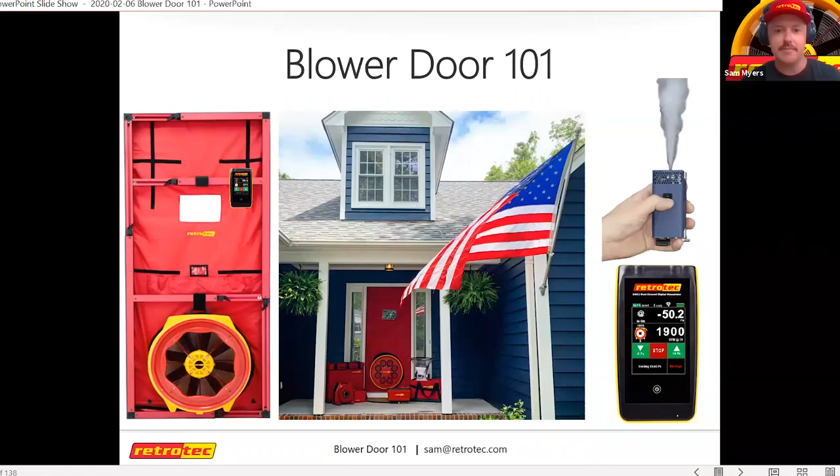A little bit about myself. I kind of serve as Retrotec's in-house building science consultant. Used to be a HERS rater for an engineering firm in Raleigh, North Carolina called Advanced Energy. So I'm a recovering HERS rater, I guess. So I used to be in the field quite a bit doing this kind of thing.

So let's start off with air tightness and why we care about this sort of thing. Why do we test houses for air tightness? Sometimes code requires this, or from a builder standpoint, it can be for quality control. If a builder says they build great houses, it's nice to have the papers to prove it, to go along with it.

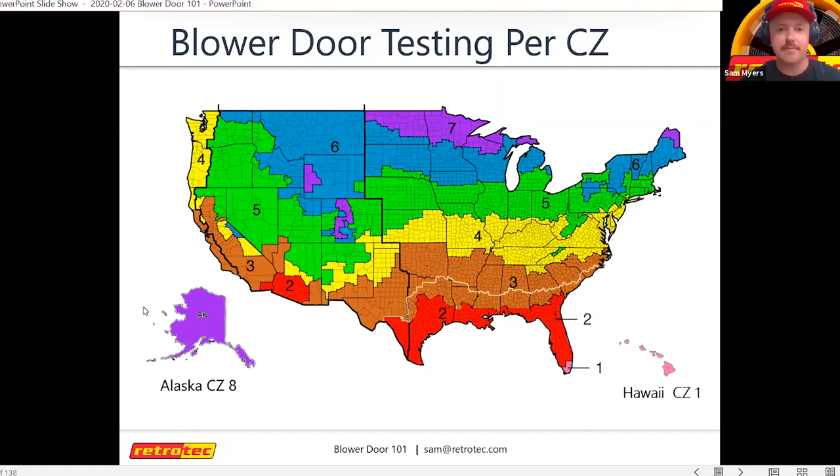And also, how air tightness affects you really depends on what climate zone you live in. I live in the Southeast, down here in Wilmington, so we get pretty hot and humid during the summer. So humidity is a big thing that has a relationship with air tightness of the houses that we live in and that we build. It also depends on how stack effect is going to handle that building as well. So sometimes we run into different problems, whether we live in hot or cold climates.

But if you think about the air you breathe inside your house, where does it come from? It comes from outside. And how does it get in? Through leaks within the building. And it brings other things with it: humidity, dust, pollen, sometimes pests, and whatever the pests leave behind, and on and on. So all those things end up in our lungs at some point. So indoor air quality has definitely been a hot topic for the HVAC community and the building community for the past few years. And so air tightness plays a huge role in that, as well as keeping all kinds of pollutants out, keeping pests out, and things like that.

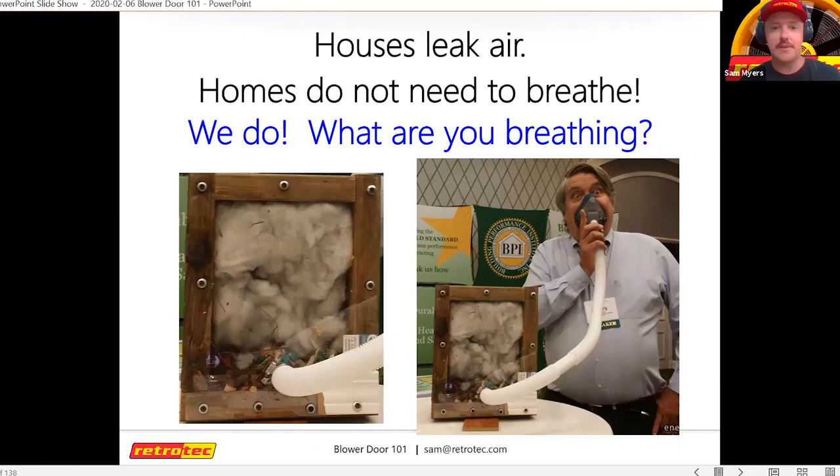So when we started blower door testing, really back in the 80s, it was all about energy. We want to keep our energy bills low, and of course, we're still doing that. It's a huge benefit to making airtight homes. But chances are, if you have an existing home that's having issues, they're going to call to get help about comfort before they will energy. Comfort sells more than energy does. That's just what we've seen across the country. But indoor air quality is coming up too, just as important, especially for people that have COPD, asthma, things like that. Having an airtight, well-ventilated home really helps with those symptoms.

And so this chart kind of breaks down where some of our issues come from and how they impact. So floors, walls, and ceilings: for existing homes, if we're going to try to patch stuff up, a lot of our problems are going to be solved at the ceiling and down at the floor if it's a crawl space or a basement. Duct leakage is also a part of our blower door number, so having tight ducts is important.

People used to think windows and doors were the majority of it, but as you can see, that's about 20%. It's these other places that we can't really see with the naked eye, and that's why blower door testing and then having other tools as well, such as smoke emitters and thermal cameras, can really help us see where those issues are located.

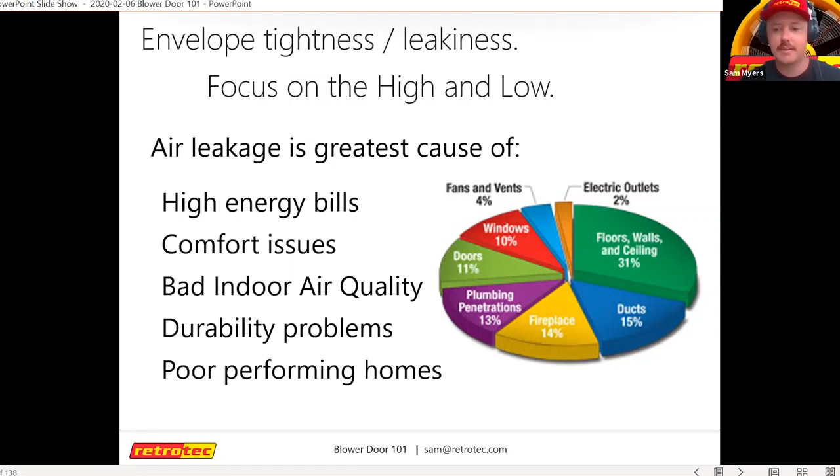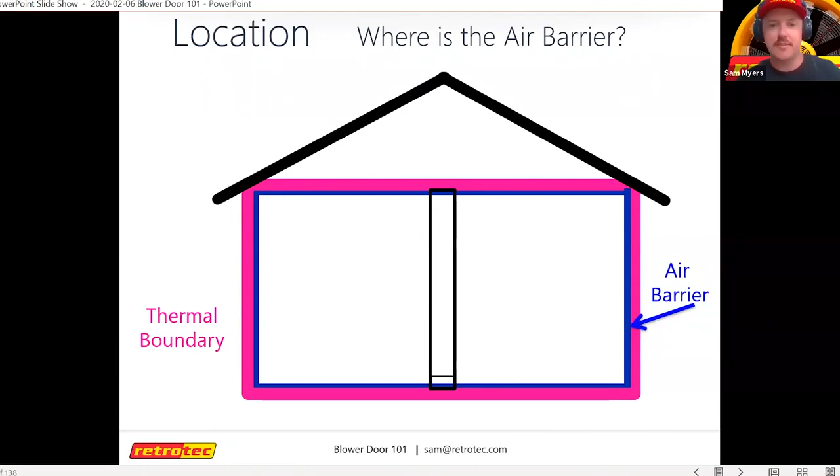So when talking about air tightness of a house, we have to get familiar with this term called the air barrier or the pressure boundary, whichever one you want to call it. They're interchangeable terms, but it's basically that part of the house that defines inside from outside. It sounds pretty simple, but with more complex building types, it can be kind of tough to determine where that is, especially if you have a spray foam attic that may be adjacent to other vented attics. It changes.

So it's important to know where that is, because that's the pressure boundary that we're actually testing, and that's where those problems are occurring. So if it's like your typical house with a vented attic, this blue line coming across here at the top of the ceiling is going to be our air barrier here. And so that's the ceiling drywall. But we also have to include everything that goes onto that. So if you think about all the penetrations that are in a ceiling, that's where problems are coming from. So if we have ducts in the attic, can lights, junction boxes, ceiling speakers, things like that, that's going to cause issues.

And one of the leakiest parts of the house that people don't realize is where this drywall meets the top plate. And you have this crack down the middle here. And if you think about how many tops of interior walls you have that have hot attic space above them, that ends up to be quite a big hole. So pressure boundary, air barrier, whichever one you want to call it, it's good to get familiar with that and learn where that is on the plans and how that's going to impact the house when you run your test.

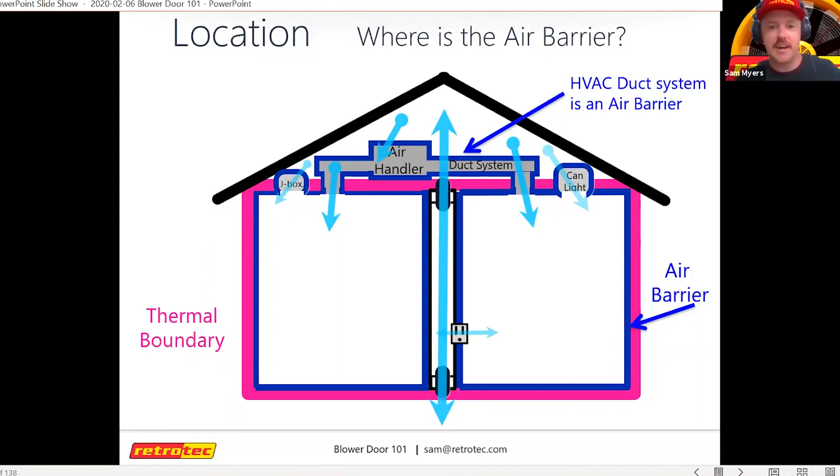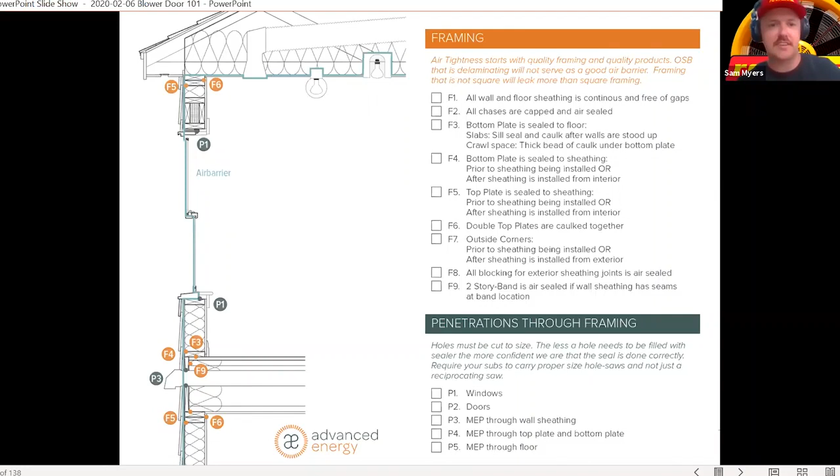This is a diagram we drew up when I was at Advanced Energy to kind of show where this air barrier is for new construction. We like to put it on the sheathing. So there's great products out there to help out with that, like Zip System. That'll actually help you build airtight walls. But then you have these transitions for windows and ceilings, and then the special points there you have to pay attention to when you're air sealing that maybe products like that won't cover. And then as it transitions to the ceiling here, like I was talking about before, where your duct penetrations are, lights, things like that.

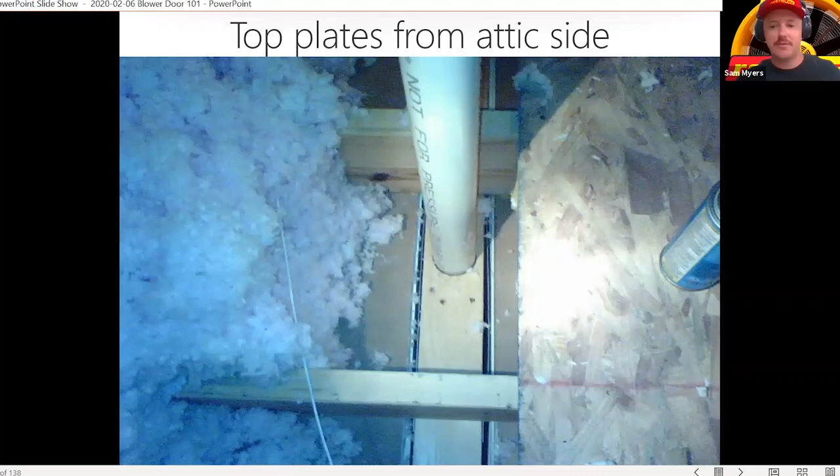So you can spray foam the entire roof deck, or you can do what they did here and actually seal that leak up directly. You can use spray foam, caulk. I've seen people use bucket mastic before. But yeah, that's a pretty big leaky point in most houses out there that didn't have intentional air sealing during the design.

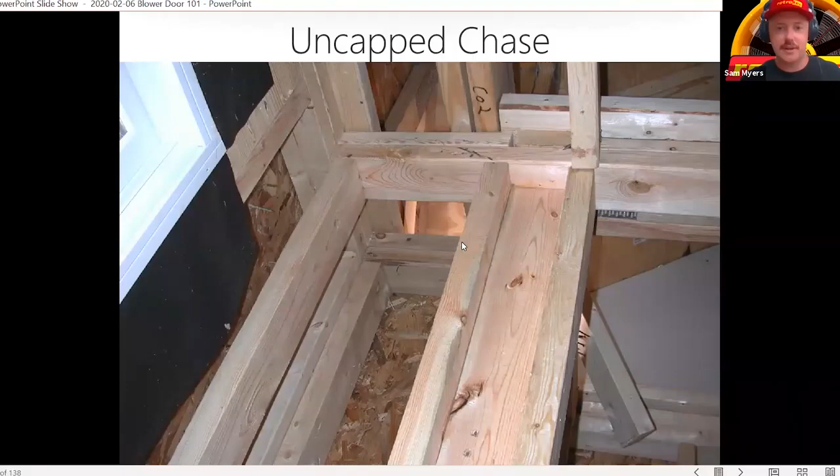Chases are another big thing. We can see this big opening here. Maybe they were planning to run a duct down here and then decided to move it. But these need to be capped and sealed. This is essentially like having a window open at all times in the worst possible place of the house. So that's another thing to pay attention to on plans, where these things are typically overlooked in traditional code-built homes.

Corners: anytime one material meets another, that's probably going to cause an air leak there. So like caulking your subfloor to the bottom plates, caulking corners. This one's not caulked here, but this is a 2-stud corner, so hopefully it's caulked back on the other side of that one. Windows and doors, obviously, using low expansion foam there is a good option like they did here.

I have seen some builders mess up and use high expansion fire foam, which will jam up that window and ruin it pretty much. So always make sure it's low expansion foam if you go that route. But if it's a tighter fit in there, you can also use caulk. Backer rod also works as well.

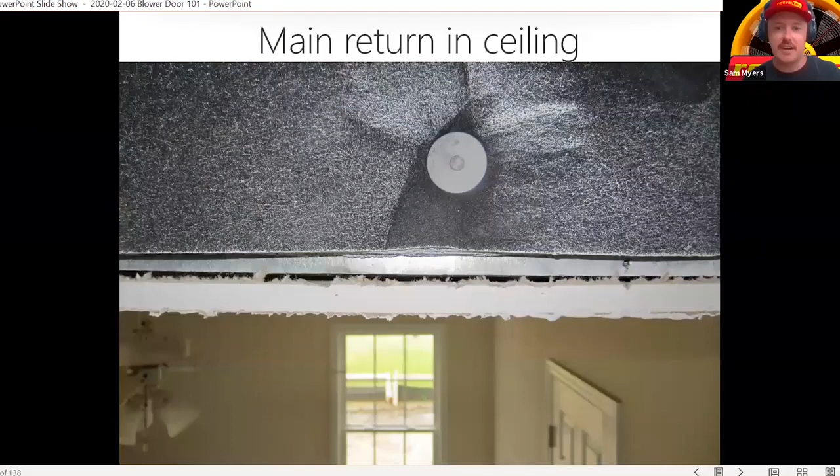And our mechanical penetration. So this is like if you stick your head halfway into a ceiling return, that gap there between the return box and the sheetrock, that's kind of a double whammy. That's duct leakage and envelope leakage all in one. So basically that return is pulling in air from the attic through that crack too. So that's not what we want.

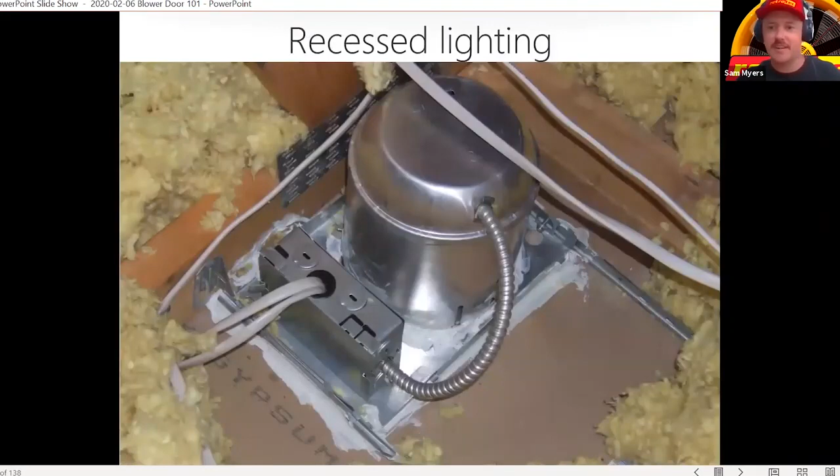So we want to have a nice beaded caulk to seal that up, and same for the supplies as well. And bath fans, any type of mechanical penetration, you want to keep that sealed. Recessed lights, these are always fun to work around. If you get the airtight lights, they still do leak a little bit. What some builders do, they'll seal something like this, but you'll still get some leakage through that assembly.

So I've seen some actually build a box out of either plywood or drywall or rigid foam and set it over that can light and then seal around that, and actually make that box part of the air barrier to move around it. So there's products out there too made just for can lights to air seal. So there's more than one way to skin a cat for sure. So that's kind of a quick and dirty rundown on air leaks in a house.

So now I'll kind of dive into the blower door equipment, what comes in a kit, and how you set it up. So whether you buy Retrotec or Energy Conservatory, when you buy a blower door kit, it's a calibrated fan. You have an aluminum frame assembly that expands into the doorway and a cloth to fill the rest of that in. And you get a digital manometer, which is what's going to give you your flow reading. So these are basically the essential components here.

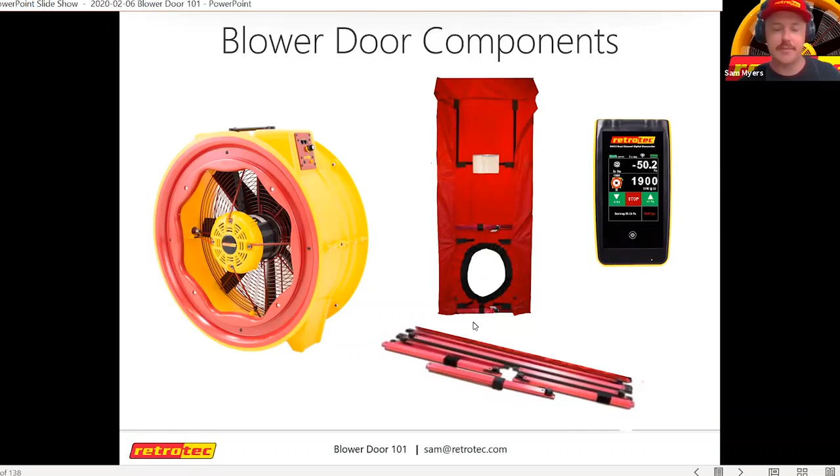And with Retrotec, you have the option, you can do this frame and canvas, or we have these expandable hard panels that pop into the doorway. Both work great. It's really just personal preference. But the frame and canvas is what we typically see the most. They're less expensive, but some people like the hard panels because they look a little more professional.

And with our frames, they just snap together on the corner. So they're numbered on each end. So you match a number 1 with the number 1 and work your way around until you have your rectangle built. But we have different ones. If you mainly work with super tight houses that are going for like passive house numbers, we have a small window frame. So you can actually test leakage in the windows too.

And if you're dealing with flows under 1,000 CFM all the time, you can actually get away with doing your blower door test with a duct tester fan. And that's what this is here. And we have a canvas with a smaller hole for that to fit into. So a lot of the guys that mainly test for passive house or mainly build passive house, sometimes this is all they use because that's all they need. They don't really need to generate much flow.

But we also work on the other end too. If you have really tall doorways, like 9-foot doorways, that you build a lot, we have an extra large frame to fill those in. But yep, they pop together. And once you get this down pat, you can have a whole system set up in under 10 minutes usually.

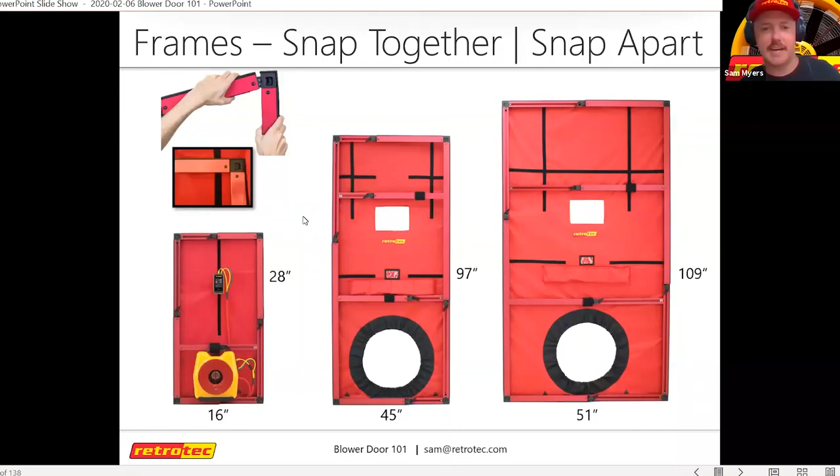Sam, do the hard panels leak less? They actually leak a little more. It pretty much simulates a leaky doorway, like one with pretty poor weather stripping. But you'll probably get, I think it's 14 CFM more leakage than the frame and canvas. Thank you. Yep. But that's what these look like. These are the hard panels. And so, yeah, where they leak are these seals where the panels meet.

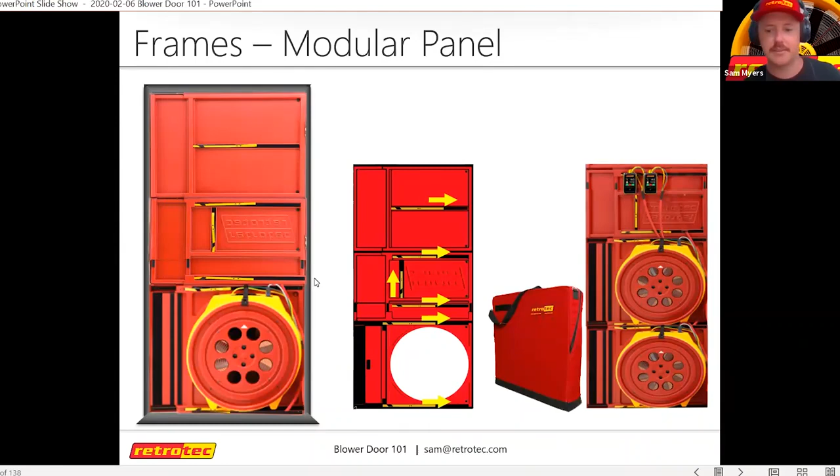So we'll talk about how one of these works. So as I mentioned before, we have a fan that we set into this thing. And it actually has 4 little pickups. And the Energy Conservatory fans work the same way. So I think I have a closer, yeah, here we go. There's 4 tiny little holes here that pick up pressure, and there's an airtight tube that goes around the circumference of this yellow piece we call the nacelle of the fan.

And then that ties into this yellow port at the top of the fan where your manometer plugs in. So what that's doing is reading fan pressure. That's how the manometer knows when your fan gets to 50 pascals, or when your house gets to 50 pascals of pressure. So no matter what house we test, if it's residential, we test at 50 pascals. That puts every house on an even playing field.

And essentially what that's like is it's like a 20-mile-an-hour wind on all 6 sides of the house. So floor, ceiling, and all 4 walls. But on the other end, 1 pascal of pressure is a very small amount of force. So 1 pascal is equal to 1 gram over a square meter. So about what a paper clip does. It's actually a small amount of pressure.

So if you worked in HVAC and you're familiar with inches of water, there's 250 pascals in 1 inch of water. So this manometer is what we're actually calling a micromanometer. It's accurate within 1/100th of a pascal. So it has very, very granular sensors in there that are super accurate on this kind of thing. So that's how the manometer knows when the house gets to 50 pascals by reading that fan pressure.

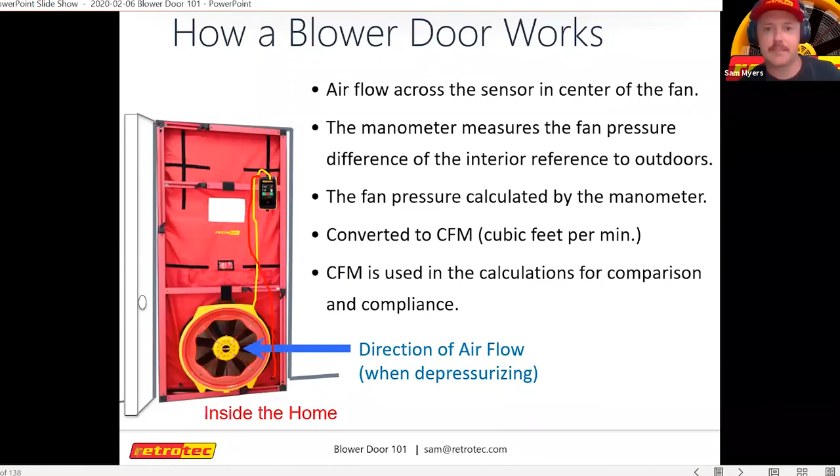So there's basically 4 little pinholes in here, so it's important to keep those clean. Sometimes they can get gunked up if you test a lot of dirty spaces. There are ways where you can test to see if they're clogged or not. I've got some videos online on our YouTube channel on that if you want to look into that. But equipment maintenance is another hour-long discussion on itself.

So this is essentially what we're doing when we test a house. We can test in either direction. But I like to depressurize the house. You can either depressurize or pressurize. The reason that I like to depressurize when I can is because you're pulling bath dampers and kitchen dampers shut instead of blowing them out. So you'll actually get a little bit tighter number and not include those in.

Some people get more detailed and they'll test in both directions and take the average. When we test commercial buildings, that's what we're required to do. But for homes, that depressurization number is enough to tell you what's going on. And that way you're not including those dampers that'll blow open. But with respect to outside, the house will be negative 50 pascals, which means right on the skin of the air barrier is a positive 50 pascals.

And this is helpful because if we have another manometer that can read pressure, we can go around the house and look for pressure differentials to find leaks that way. So we can actually find leaks with a manometer that's just reading pressure on both channels. So again, that's another diagnostic we can talk about later on. But this is essentially what you're doing to the house. And again, it's like a 20-mile-an-hour wind hitting all 6 sides of it.

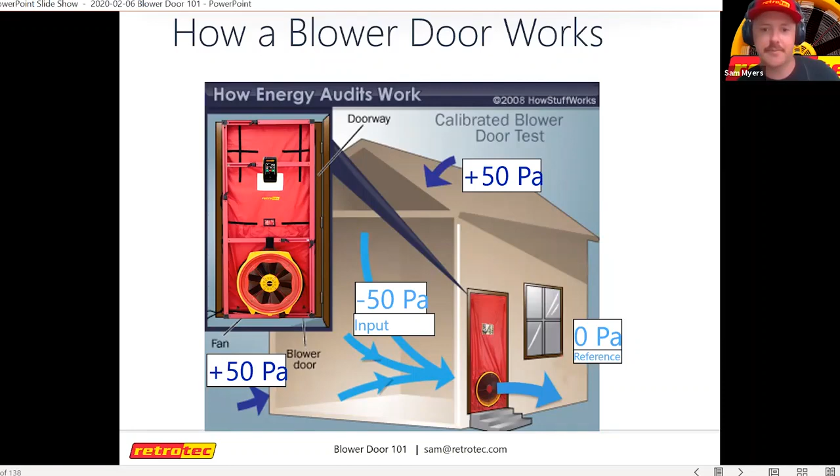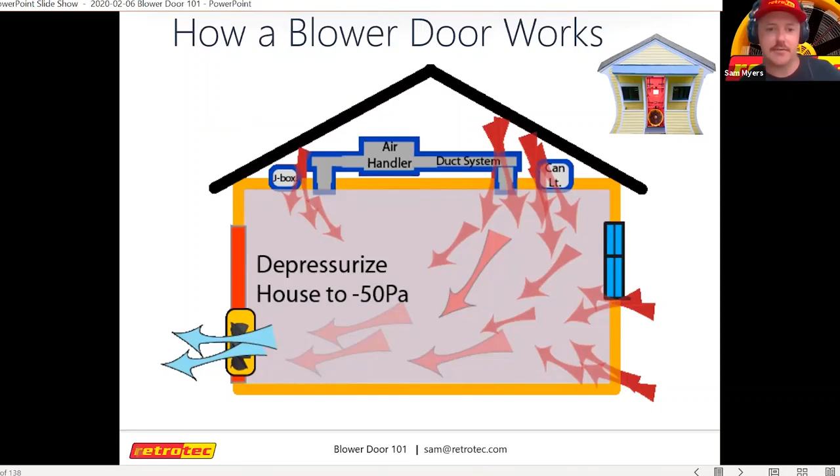So what you're doing is you're exaggerating those air leaks. 50 pascals is enough pressure to balance out the house to see what's going on. So you're just artificially moving air through every leakage point, and the fan is able to calculate flow from that. And the reason that is, actually, I'll get to that in a second.

So here it is, again, depressurizing versus pressurizing. You just flip the fan around. That's really all you do, and you run the test the same way both times. Just with pressurizing, you'll blow dampers open, and you'll likely get a higher number.

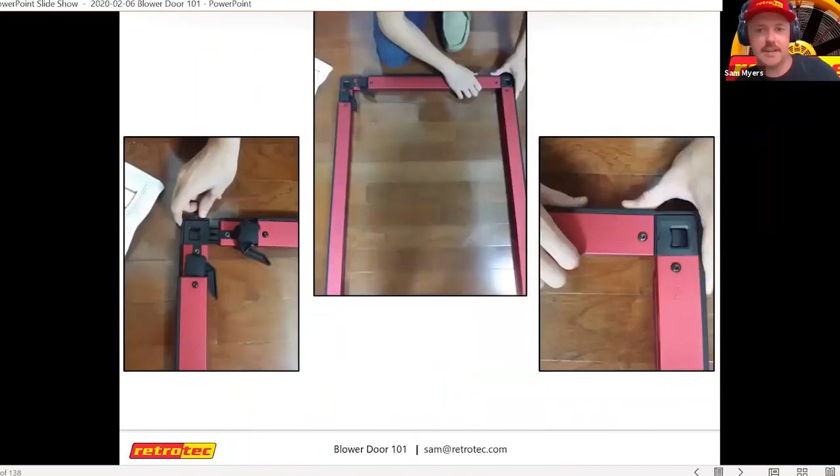So we'll quickly talk about setup, and we'll just do this with the frame. All of our products come with a hard copy quick guide on how to set up anything, whether it's a frame or a fan or a manometer. So again, like I mentioned, you just pull those frame pieces out. It comes in this little shoulder sling. Get your rectangle together. Again, they're numbered, so match 2 to 2, 3 to 3, 1 to 1, 4 to 4. And they just pop in like so, and you have a nice rubber seal all the way around.

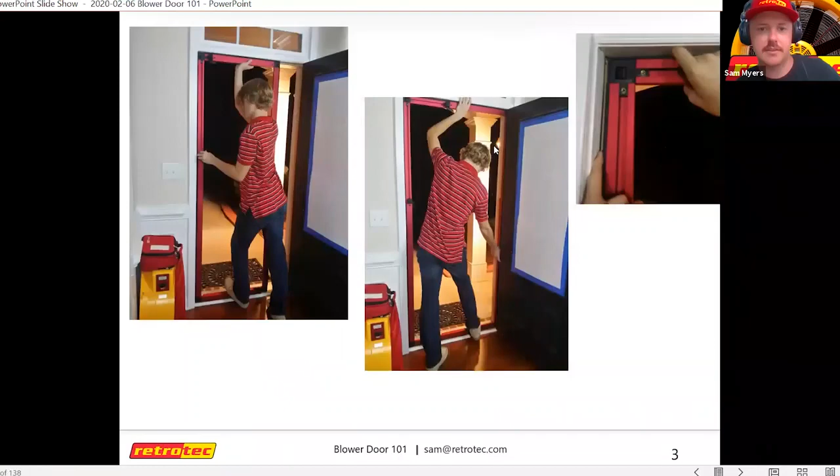And it has these little cam levers on each piece, so you just loosen those up, and that'll allow you to spread that frame out to fit the doorway. And then there's a cross piece. We give you 2. One is where the fan's gonna hang from, and then we have another one to give you extra stability towards the top. Last thing we want is that thing blowing out of there like a sail. So we want a good tight fit inside the door there.

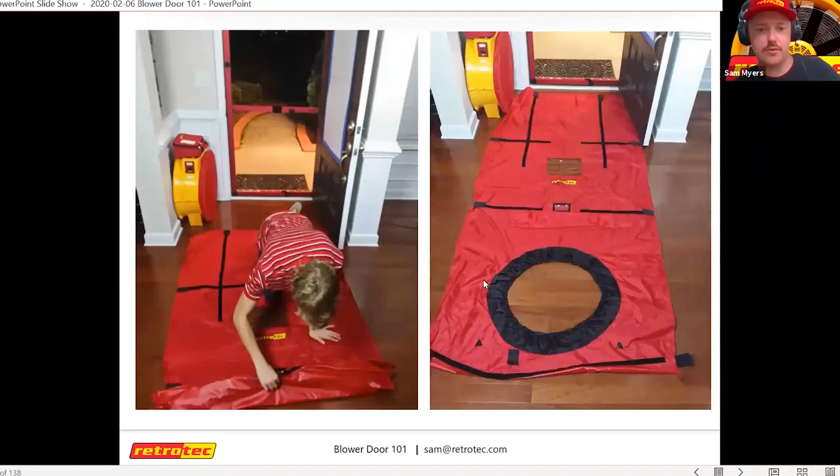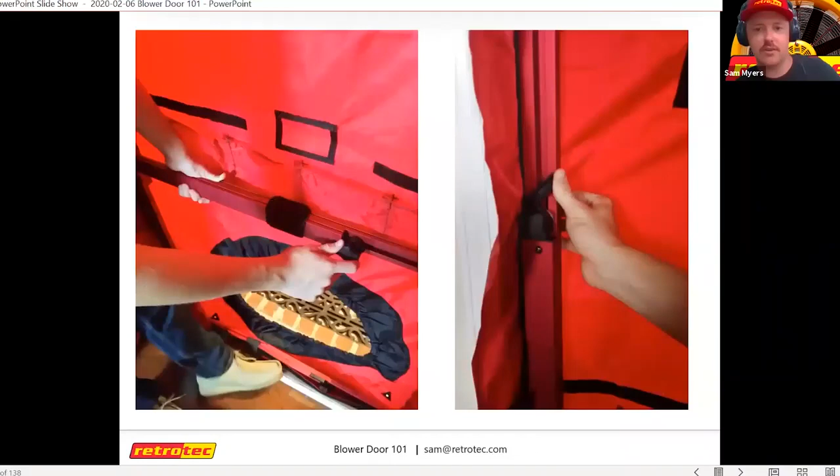And then we get our canvas and just spread it out on the floor. It has these little Velcro tabs where we can fasten it into place. And then we pop it back into the doorway. And then we make sure everything's nice and tight. These cam levers, we hand tighten them down, and then you flip it and it gives you some extra tightness in the doorway there for a good snug fit. And you just do that all the way around and on both crossbars. And then we set up our tubing.

So for our tubing, it all comes bundled together in one piece. We call it the umbilical. It's got your tubing, your data cable, and a charger cable for the gauge. Our manometer charges with micro USB. So just so you're not dead in the water, we put a USB port on the fan itself, so that way you can charge the gauge off the fan if you forgot to charge it the night before. But all that's bundled into one piece.

But one piece is a red tube. So if you just remember, red tube goes to red canvas, and you just pop it through this little hole down there and throw it off to the side. And you want to get it off to the side at least 5 feet away from the fan. You just don't want the fan to affect it. You want this to read kind of a zero pressure outside.

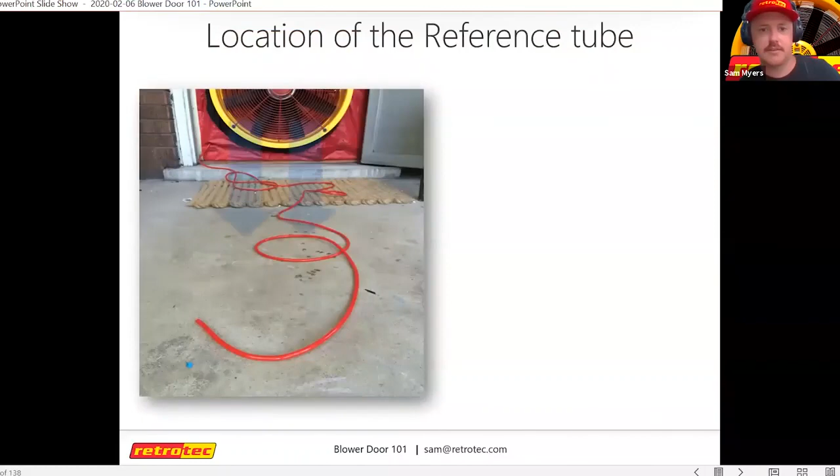So Sam, if you forget to throw that out, you can always do the crawl of shame. The crawl of shame. Yep. That's just when you have to crawl through the hole yourself. And we've all been there. There's people who've done it and people who haven't done it yet. It happens to everybody.

One difference that I need to mention between the Energy Conservatory and Retrotec is if you're pressurizing with a Retrotec system, you do not need to add an extra tube from the outside. With the Energy Conservatory, you need to add an extra tube or your reading will be 20% off. The reason is because the fan is manipulating pressure inside the house, so you need to cancel that out. The Retrotec manometer actually feels that fan pressure on one of the open ports and then mathematically removes it. So that's one of the setup differences between the two brands there.

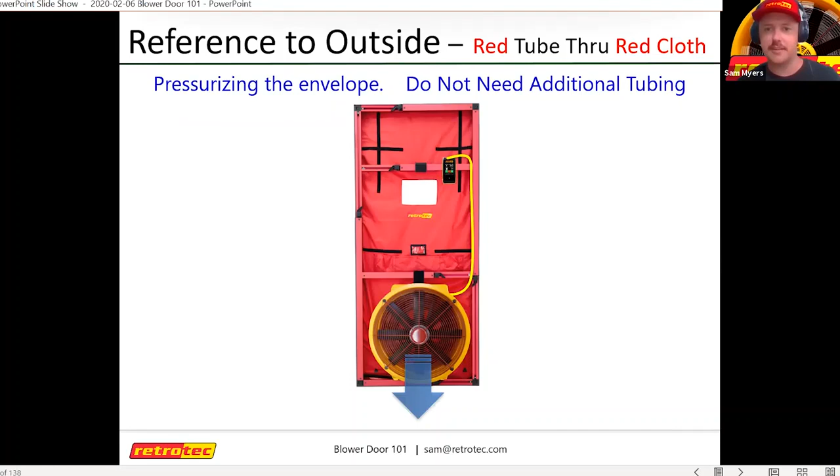But once we get to that point, we have this little shower cap cover. Both brands come with it. So we just pop it over the inlet side there if we're going to set up to depressurize. And then there's this little elastic hole. Again, both brands set up the same way. There's this lip around it, and it locks it into place. And then you strap the handle into the top just to hang it a few inches off the ground.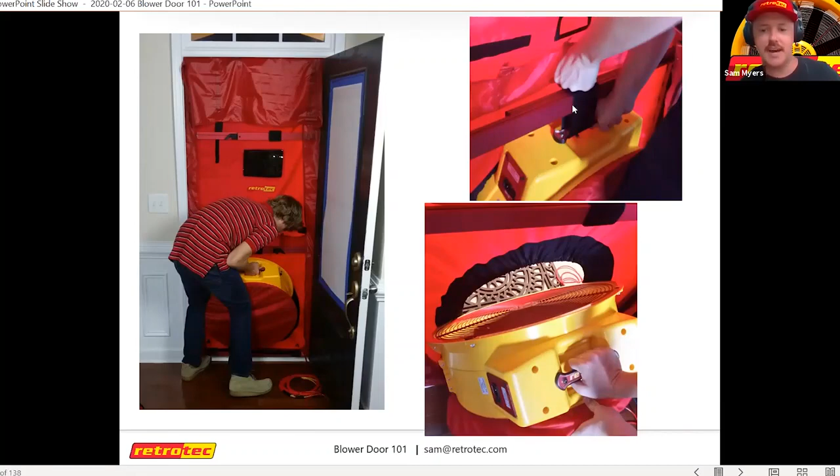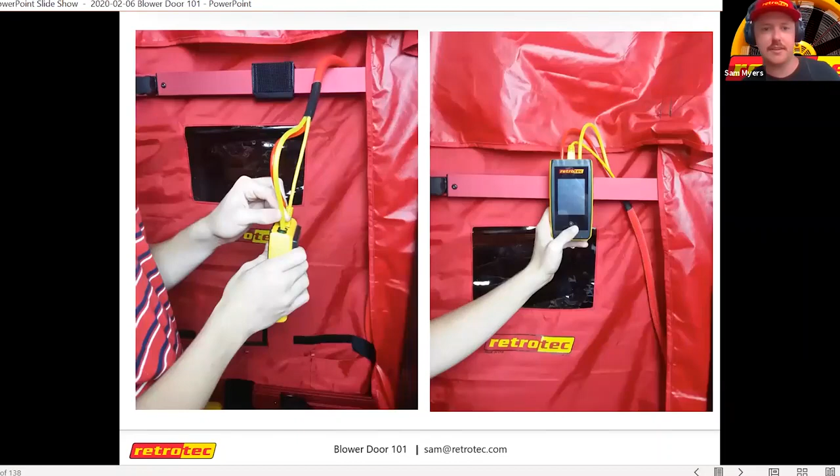And then for us, everything's color coded. So yellow hose to yellow port on the yellow fan. And then you put the other end on the yellow port on the gauge, and then red to red. And then we have this data cable here. It's a Cat5 cable, and this allows the manometer to control everything. So there's a manual dial on the fan, but you don't really need to use it. You can just enter 50 pascals on the gauge and hit go, and it'll run the fan by itself. You just pop everything in like so, and the fan comes with this little pocket on the bar, so you can keep it up there and not have it lying on the floor.

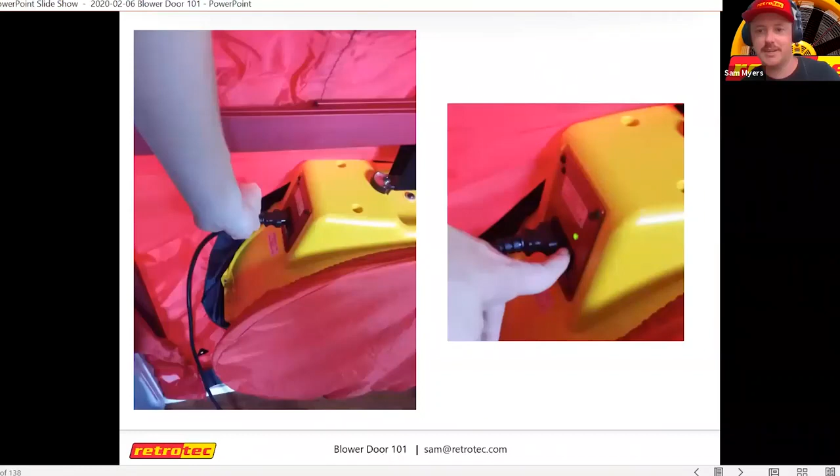And of course, we got to have power. Plug it in the wall. If you get into any larger testing where you need more than one fan per circuit, or you're going to be tripping some breakers. And there's this green status light.

So if that's ever blinking or red, and you have everything plugged up, that means your Cat5 cable went bad, or the gauge is not reading a fan. So as long as it's on, green, and steady, you're good to go. But if you notice that it's blinking or turning red, that means try a different cable. It just might need to be replaced. So that light does have some meaning to it. And then we're good to go from there.

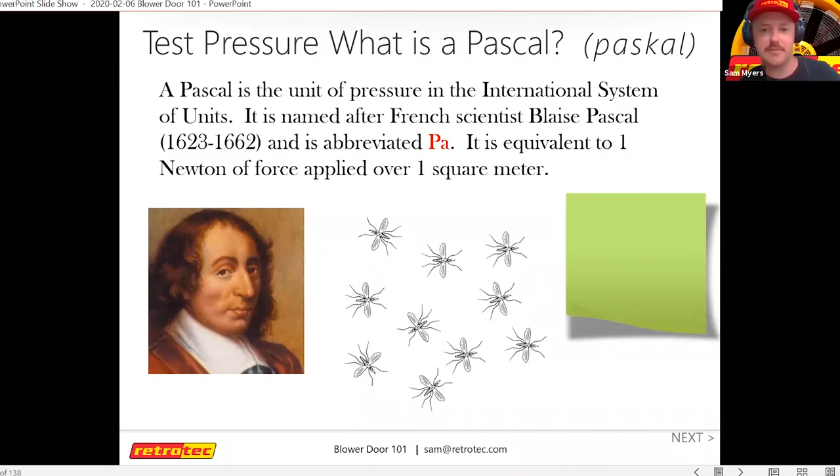I'm going to talk about some house setup in a minute. Talked about that. Yeah, so the term Pascal is named after a French scientist, Blaise Pascal. And again, it's 1 Newton of force applied over 1 square meter. So very, very, very small amount of pressure. Sam, I always like to say that one PSI is equal to almost 6,900 pascals. Okay. So it's like you said, paperclip, but it's enough to get a reading without damaging the house.

Exactly. And we'll get into this later, but yeah, I like to start the fan off at 25 pascals if it's a new house I haven't been into yet. And then just kind of walk around and see if there's any weird smells or anything like that. Make sure all gas appliances are off and things, and then start up. I did a test one time on a house that sat vacant for 2 years, and all the P traps emptied, and I didn't check them. And yeah, I did not have that fan on for very long. It was awful.

So yeah, start off light, walk around, check for anything weird, and then once it all seems okay, especially houses with fireplaces that have been used, like if it's a wood burning fireplace and you're depressurizing, that's one of those instances where I like to pressurize instead and not pull that stuff inside. Another one, if I know there's mold growth on the air barrier somewhere, I don't want to depressurize and pull that stuff in. So pressurizing is a good point there.

And then this is worth mentioning too, like if you're working with older existing homes, if you know that there's vermiculite insulation in the attic, do not run a blower door. That is the only time I say you don't run a blower door test. So there's actually a trust fund out of Charleston. I think it's the Vermiculite Institute or something like that, but they'll usually cover about half of the remediation to get that vermiculite out and better insulation installed.

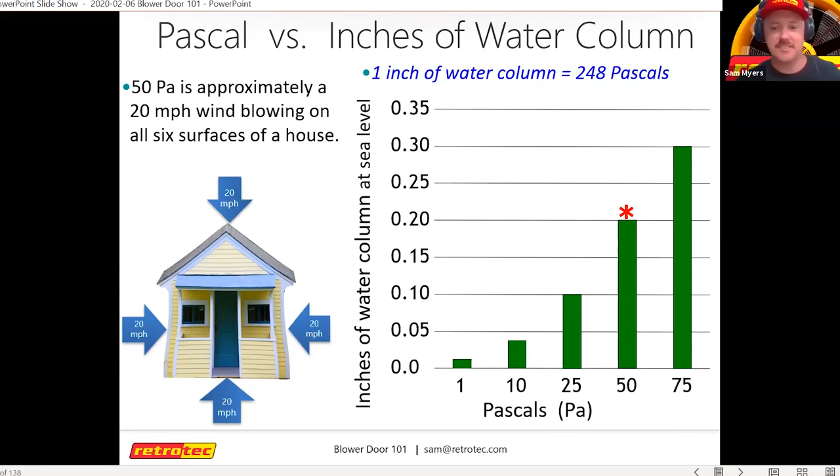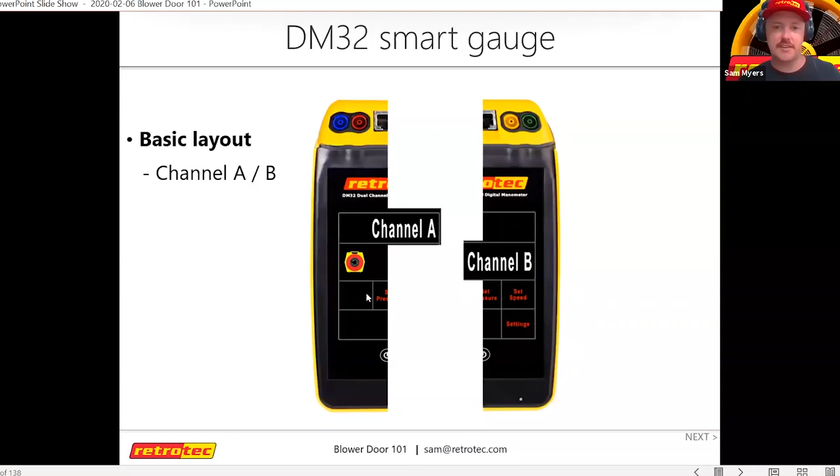Let's see here. So if you look at the top of the manometer, that's just color-coded ports. So channel A goes to outside, channel B goes to the fan. And again, it's 2 manometers built into one. So there's a pressure sensor on both sides, and they're just working together. You just have to have all of that together to be able to get the reading from the blower door. And I pretty much covered this earlier.

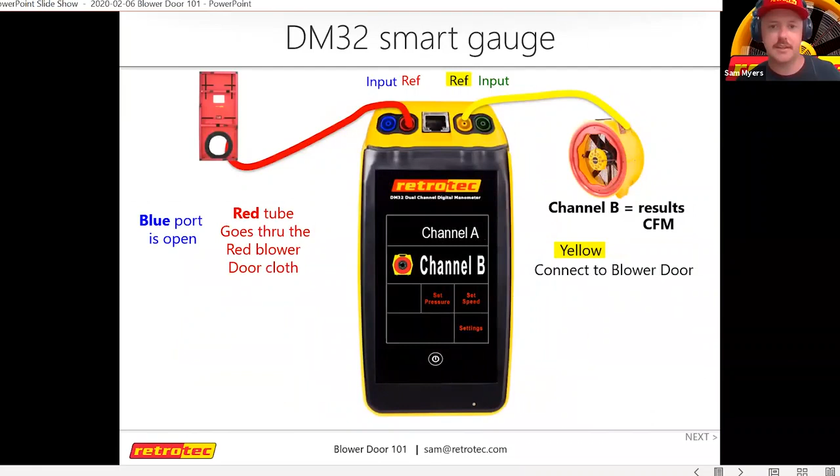We tried to make this as easy as we can with the color coding. If people are colorblind, there's not much we can do about that. But we don't call it idiot proof, we call it idiot resistant. Some people still have screwed it up before, but we tried to make it pretty simple.

So if you're looking at the gauge, channel A is here on the top, channel B is on the bottom. And so you can get different displays to come up here for channel B. You can have it read pressure on both channels, and you can have it read flow. But CFM is what you want it to read here on channel B.

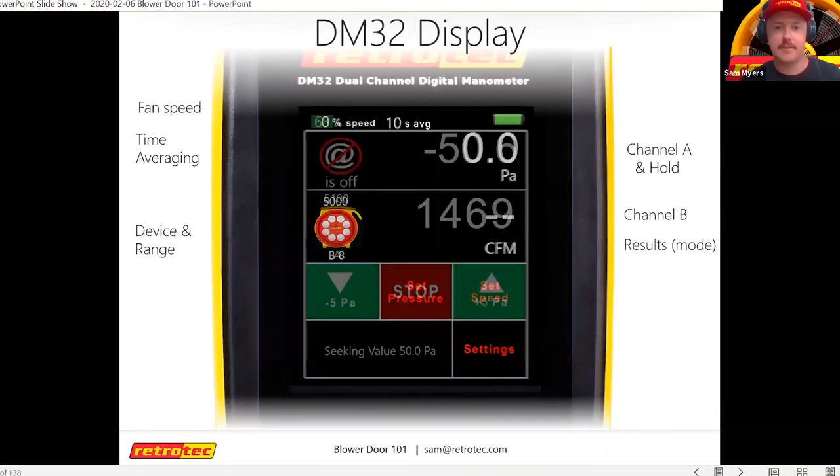So this is if you're doing a blower door test and you're doing it right and it all falls within the fan's limitations, you'll have your 50 pascal reading here on top, and then whatever your flow is will be down here at the bottom. So that channel B is going to give you that magic number you're looking for. So that's just an example there of a test. So that house tested out at 1469 CFM at 50 pascals.

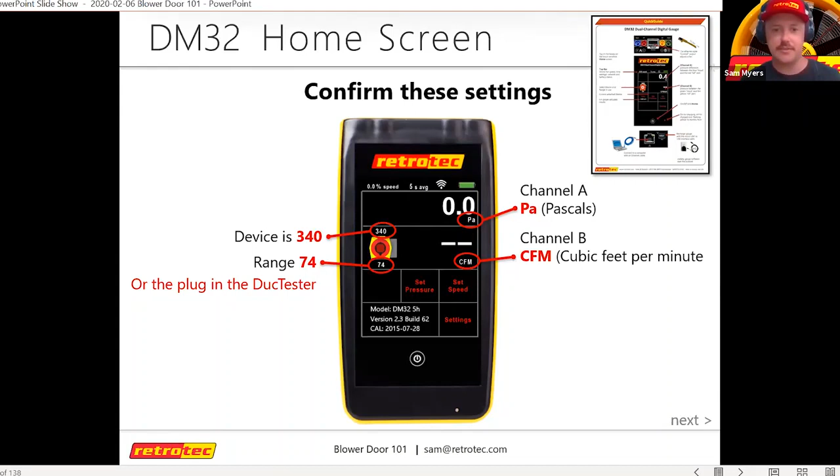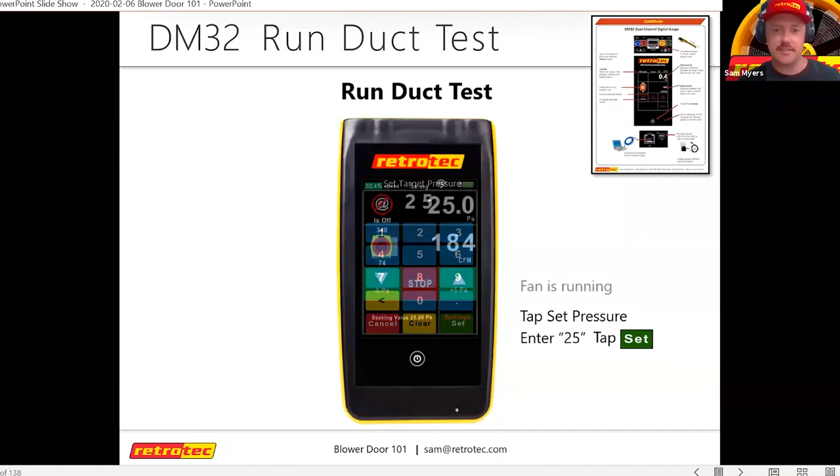You can also select your device here. So if you have multiple fans, this gauge will actually run Minneapolis TEC fans too. Or it of course runs all of our fans as well, duct testers, things such as that. So we tried to make this interface as simple as we could. So you just actually tap a picture of the fan, and it'll give you which range you want to set up. And then it'll also allow you to cycle through the different fans you can select. I've got other slides on that.

So this is one of the most common questions we get for people that are starting out: how do I know which range to go to? Like, how do I know where I need to be? Basically how this works is the larger or leakier the house is, the more the fan needs to be opened up. And then the other way around, if it's a smaller or very tight house, then you need to choke it down some. We have to do this because we have to maintain fan pressure within the shell of the fan here, so that the manometer can actually read pressure at the center of this fan, like I mentioned before.

So if we have a really tight house and we're running it wide open, this fan is going to be barely running and it's not going to generate much pressure. So we have to choke it down and put a smaller opening on this. And the way that a blower door is able to calculate the reading to flow: if you know the pressure of the fan and you know the area of the hole size, which the manometer knows on all of these settings, then it can calculate flow. And so it's just doing the math for you there inside the gauge. So that's how it's able to spit out the flow of the leaks throughout the house.

So if I'm starting out with a new house and I'm not really sure what to expect, I always start with ring A. This B8 plate, we call it B8. We used to have more rings in our older models, but now we just have one ring and a plate with holes. This just sticks on magnetically, so it's super easy to pull off. And then these range plugs just pop in and out. And then there's pockets on the cloth where you can just pop them in there to keep them off the floor. So we did this design this way because there's no moving parts. There's no little tabs you have to move around that'll break off down the road. So it just tends to hold up longer.

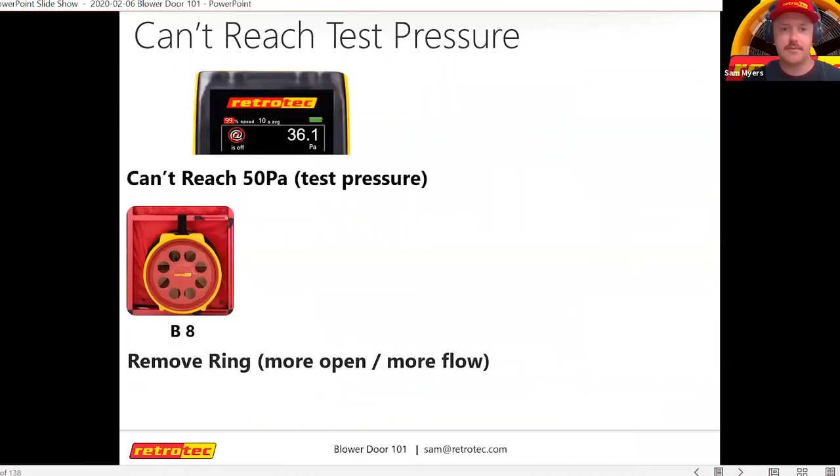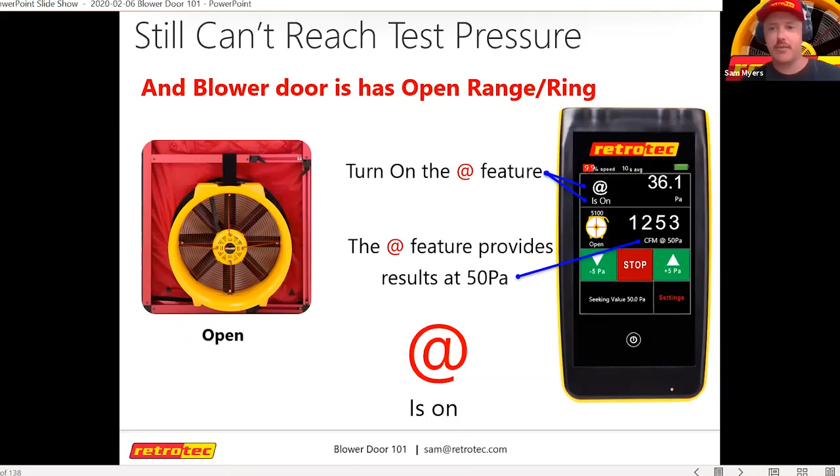So the leakier or larger the house, you have it open. The tighter or smaller, you have it closed. And again, if you can't reach 50, you open it up. And if you can't get a test pressure, you choke it down. And then we have this at feature too. And what that does is, say you have it open and you're running it wide open and you can't reach 50 pascals, so you get to like 45.

What this does is it extrapolates the reading and just does the math for you and says, well, if we could reach 50, here's what the number would be. And this is only accurate within 20% of the fan's ability. So our Model 5000 will do a little over 6,000 CFM.

So for example, if you're only getting 15 pascals, nothing's going to be accurate there. It's really time to seal some stuff up. But if you're getting close there, like 40, 45, you can just hit that @ button and it'll tell you what that flow would have been if the house could reach 50. So it just gives you a little more leeway in case the house is super, super leaky.

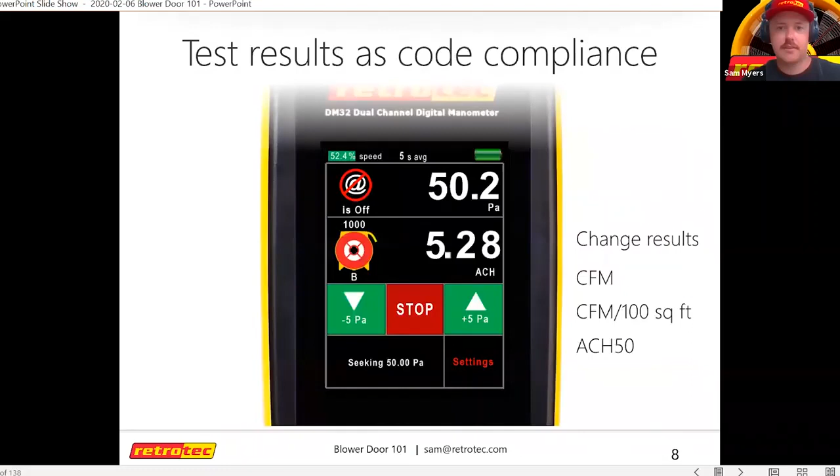We covered this. And so I mentioned air changes per hour earlier. If we want to do that, we just tap on channel B and it'll give us this list, say ACH, so we just tap on that. And anytime we want to go back home, like anytime we get down to the list of settings or something, you can just tap the power button and that'll always take you back to your home screen. So you don't have to keep hitting back.

And then this volume icon will appear and you can just tap volume and then enter the volume of the house there. And that way the gauge will give you ACH in real time.

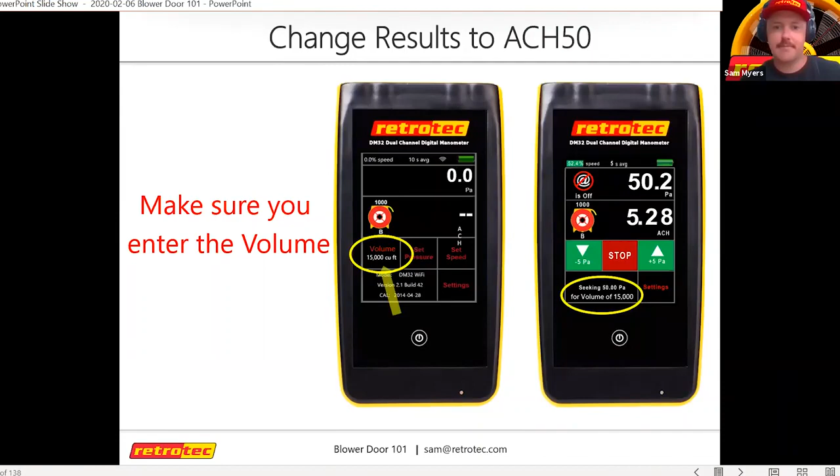Before we get into house prep, do we have any questions that we need to address in the list? I think we're doing good. Okay, keep it rolling and then we'll move on after. All right, we'll keep trucking.

So this is really one of the most important parts and probably the most time consuming part of doing a blower door test, making sure the house is good to go. If we go to the IECC codes, it really lays out some of the best practices. So for example, all windows and doors should be closed but not sealed. Latch the windows, but you don't have to tape over them or anything like that. All dampers should be closed but not sealed off.

All interior doors should be open because we don't want to block off any part of the house. We want every part of that house to be able to hit that negative 50 pascals. So we don't want to shut any rooms off like that. Exterior doors for continuous ventilation systems and HRVs or ERVs should be closed and sealed. So this is one that's kind of tricky. If you have ventilation that runs 24/7, then that's really the only time you can seal something off.

It's not very often that you have devices that do that. Usually they're on a timer and only run maybe 8 hours a day or something like that. There's so many different ways to do ventilation these days. But if it is a system that runs all the time, then you can seal it off.

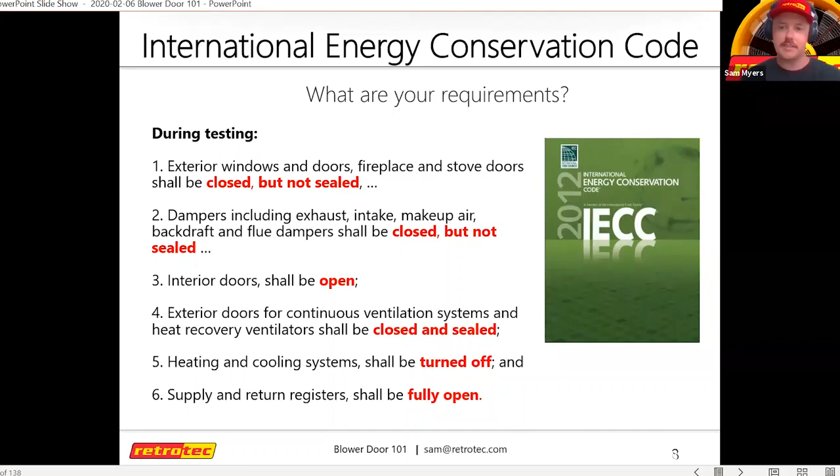So we want to go check out the crawl space, look for any weird holes or anything like that. We want to check out the attic. And if this is an existing home, we want to see if there's mold, because if there is mold growth along a floor or attic or something like that, we don't want to pull that inside. We want to check out the duct system.

Anybody ever been to an existing home where they never shut the crawl space door and cats started living in there? It's a nightmare sometimes. So we want to see if anything funky like that's going on. I had a friend that bought a house last year where that happened, and it didn't take us long to find that.

Doors and windows locked, garage door. People go back and forth on this. I say leave it open. RESNET says leave it shut. But if you want to test at the man door going into the garage, then you can open the door. But typically the garage isn't going to be considered part of the air barrier.

But again, it depends on what standards you go by. Some say we want the house in its natural state where the garage door is typically shut. So that's why RESNET says that. But I like to test with it open, just pretend that garage wall is part of the outside.

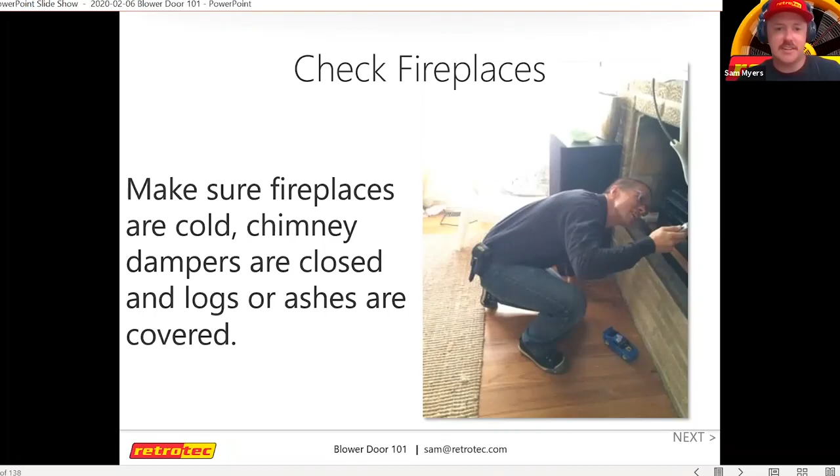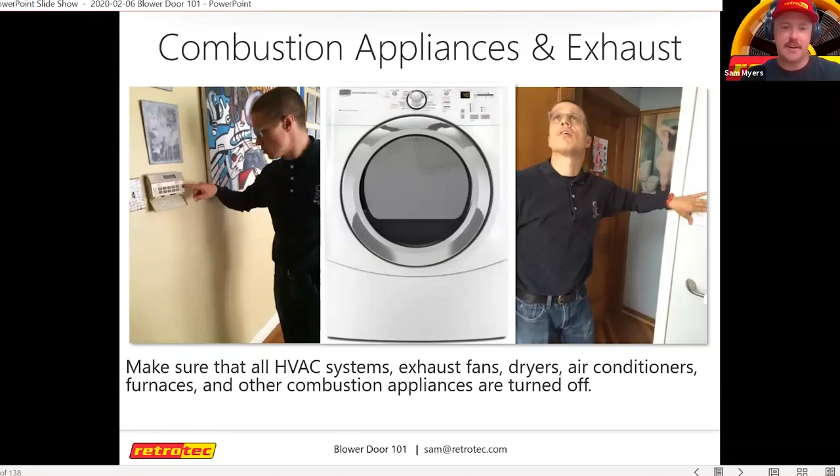Checking windows, checking doors, checking fireplaces is important. Again, if it's a wood burning fireplace, that's when I like to pressurize and then start at 25 and walk around and just make sure nothing weird's going on. Combustion appliances, we want to turn those all to pilot or turn them off. Pilot's okay. If it's a water heater or a furnace, you can leave it on pilot, and that's okay. But we just don't want any other fans running. We don't want exhaust fans running or dryers running or anything like that.

But this next section here, it says for HVAC contractors, but builders, I think, should be just as aware of how air tightness affects HVAC systems, and especially how they're selected in the design phase. Not sure how familiar this crowd is with load calculation software, but when selecting an HVAC system for the home, one of the key inputs that it has to know is infiltration of the home. The house I just moved out of in Raleigh, North Carolina, 20% of the heating load came from infiltration. And if we get that wrong, that can determine a couple of sizes. So this is why I say builders should be pretty familiar with this, because you want to be able to review that load calculation and just see where those numbers are coming from.

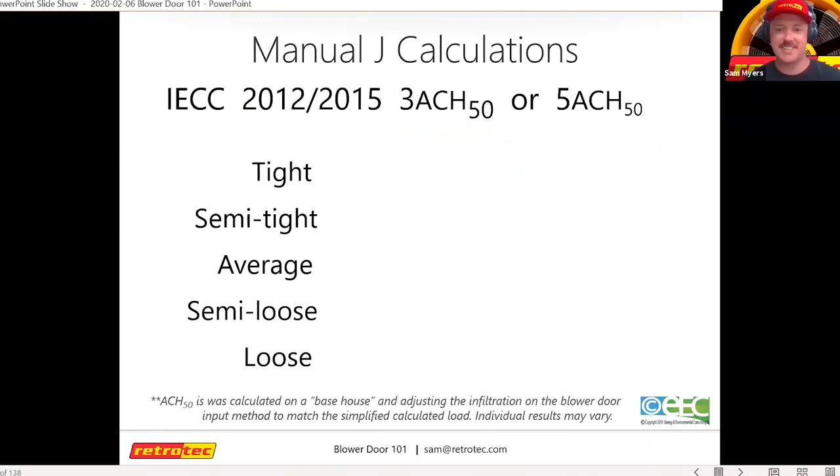Let's see here. There's some options to choose whether a house is tight, semi-tight, average, loose, or semi-loose. What a lot of contractors do is just choose average, because if they're not going to measure it, then why not? That's really the justification of it. But it could be loose. Like if you choose loose, they're saying loose is 8 ACH50, which is a pretty common number to run into if you're just looking at traditional code homes. I mean, we've seen homes that are 20, and that's way, way off the scale. So if you don't actually measure and account for that, then you can really get your sizing off.

And this can also help you dial in, especially for an efficient home, you want to try to get the smallest system you can. And air tightness testing will justify if you can or cannot do that. One of the biggest problems that we see across the country is that there's none of this design really happening, and contractors just wing it and get the system way too big. And especially in areas like where I live in the Southeast, a problem with that is short cycling. It wears the equipment out faster, and we can't control for humidity. It gets to the thermostat set point way too fast, which means the equipment doesn't run long enough to get humidity out of the air. So it just makes houses less comfortable. There's this common misconception that bigger is better, and that's definitely not the case here.

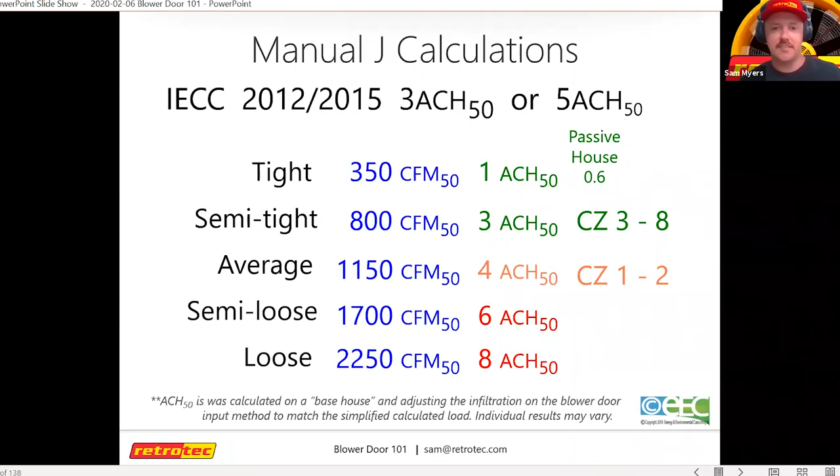So actually having a measured number to input into a load calc just gives you a lot more credibility whenever you choose a system to put into the house. So something to think about.

And a question we get is, at what point is the house too tight? And really, you can get it as tight as you want. You just have to have a good balance between air tightness and ventilation. Airtight homes and mechanical ventilation go hand in hand. When we take away all of our air leakage, we take away that natural ventilation that houses have always had. And so we need a mechanical way to pull some outdoor air in and filter it and control it throughout the day. There are all kinds of ways to do that, all kinds of good products out there. But it's important to have a good design for it.

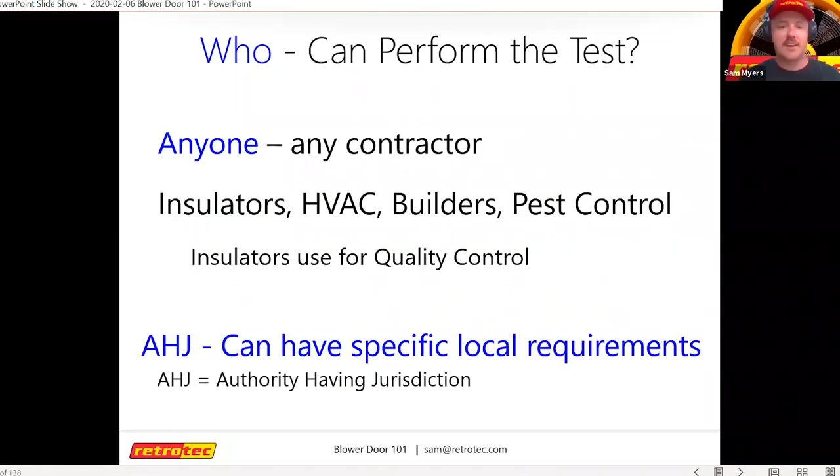And another one is who can perform the tests. If you're trying to do it for code, different states have different requirements. But if you're just doing it for quality control, of course, you can just run them yourself and make sure you're on path with whatever target you have.

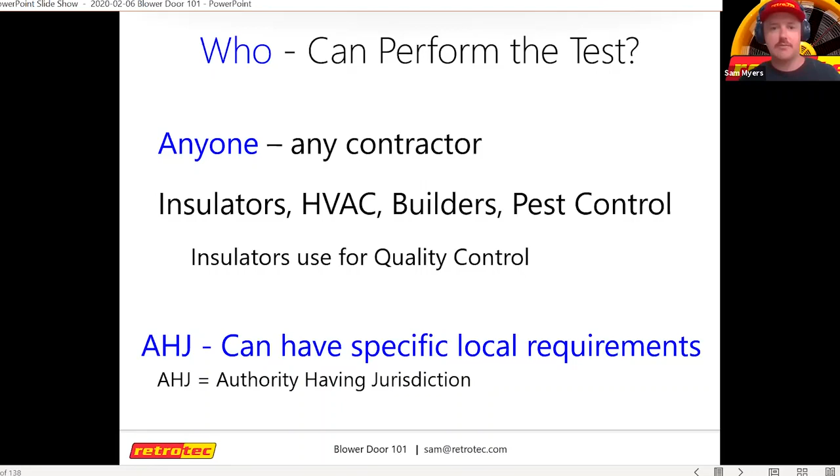I'm not going to spend too much time on this, but our equipment has evolved quite a bit. There's a couple of testing apps out there now. This one's called rCloud, which will actually geolocate where you are and find the house. You can input certain characteristics about it, and then have a saved report from that specific house that you can always go to later. So if you're like Jake, where you like to do 3 different tests per house, you can have 3 different reports and always go back and see what the progress was for that house.

This is still free to use. You just download it and create an account. You can use a smartphone or tablet. It runs the equipment right from your phone, and then gives you a nice report with a map and every aspect of the test. The weather that day, it uses local weather stations to pull that in. So it's pretty cool, and you can always have access to that information.

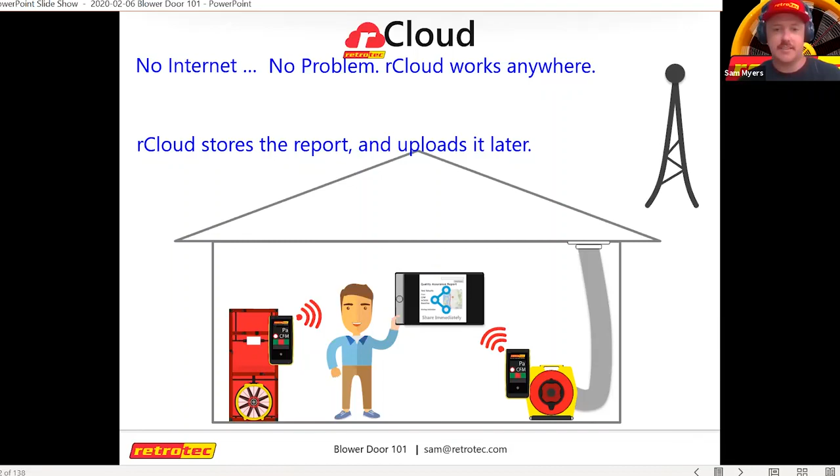That's just an example of what the report looks like. And then we have this other one called GaugeRemote, which simply mirrors the gauge from your manometer to your phone. This actually has a Wi-Fi antenna in it, so you can connect it on Wi-Fi. That way you can walk around and have the controls to your fan on your phone and a thermal camera in the other hand, and control fan speed without having to run back to the front door to adjust it. So it just makes things a little bit easier.

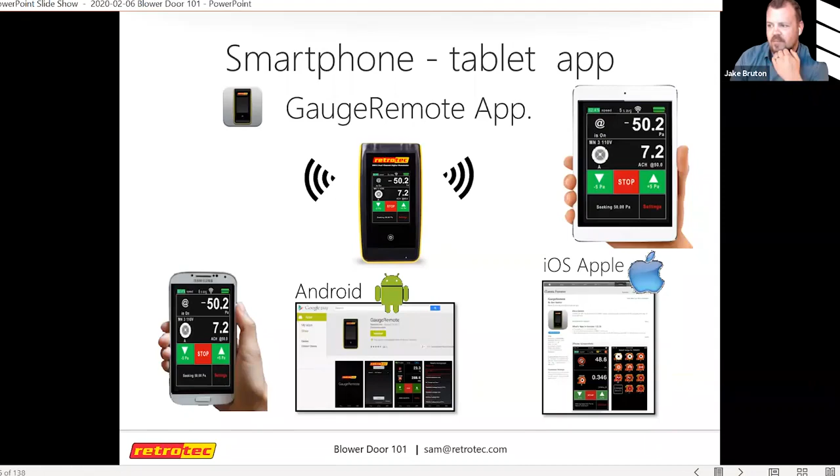So you can walk around the outside and find the leaks from the outside while the fan's going. Exactly. Yep. And we have it for PC too. So this is a good training tool. If you have guys that you're trying to teach this kind of stuff to, it allows you to put our gauge really big on the screen, and you can run through different scenarios and things like that. I use it when I train people a lot.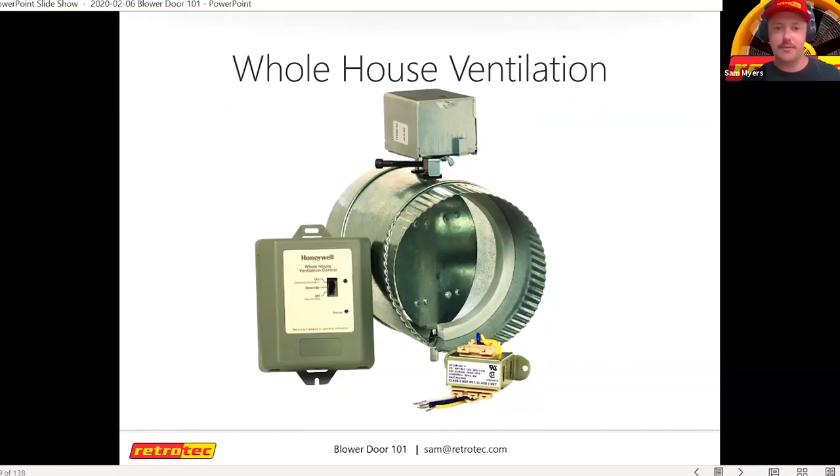And then I had a few slides on here about whole house ventilation. This is one we see a lot, where you just have a duct running from the return side of the system to the outside, and it has this kind of air cycler system on it, which is basically a switch and a timer. So if you want 8 hours per day or 20 minutes per hour or whatever, you can set it to do that, and just have the air handler run the fan to bring outdoor air in and run it through a filter before it hits the supplies. I won't get into that today.

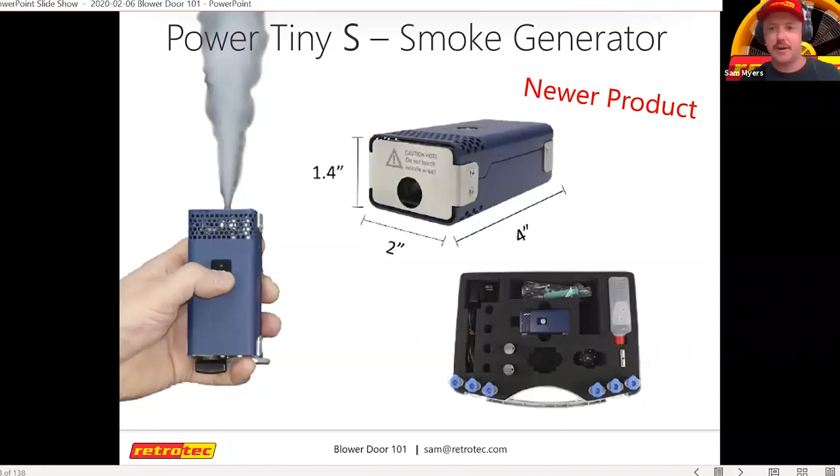And as far as finding the leaks, this is the smoke generator that I mentioned before. This is one that we sell. It's basically just a handheld fog machine where you can go around and spot check different areas. Or if the house is finished, sometimes you can inject it in the middle of the house somewhere, and you can follow it, and it'll kind of take you to the worst area in the house. We just bought a new place in Wilmington, North Carolina, and it led me to a faulty window in less than a minute. So it's just a way to see what's going on. I doubt that video will work, but we have a larger system for that too, so you can actually smoke the whole house and then go stand outside and see where it's coming from.

And I can't not talk about thermal imaging. One thing that I want to mention is that what some people do is just run the door at 50 pascals and then go do their thermal imaging, when really you want to run it at a much lower pressure, because if you over exaggerate that leak too much, it's hard to tell exactly where it came from. There's actually a standard that says that the pressure differential should be 20 pascals or less.

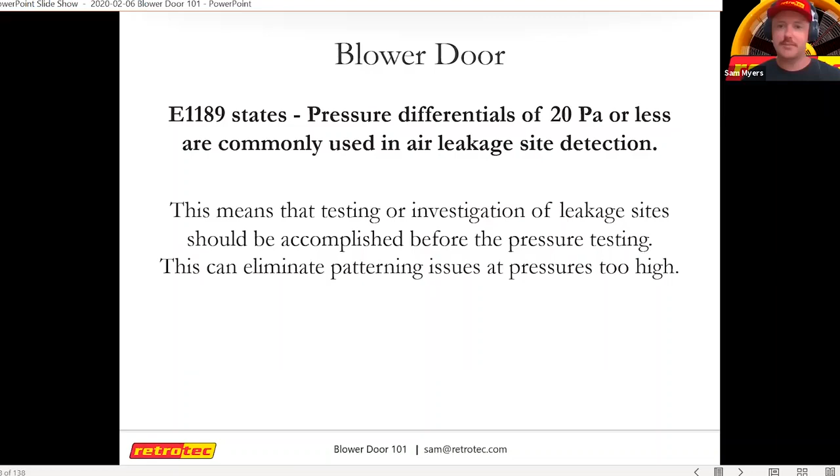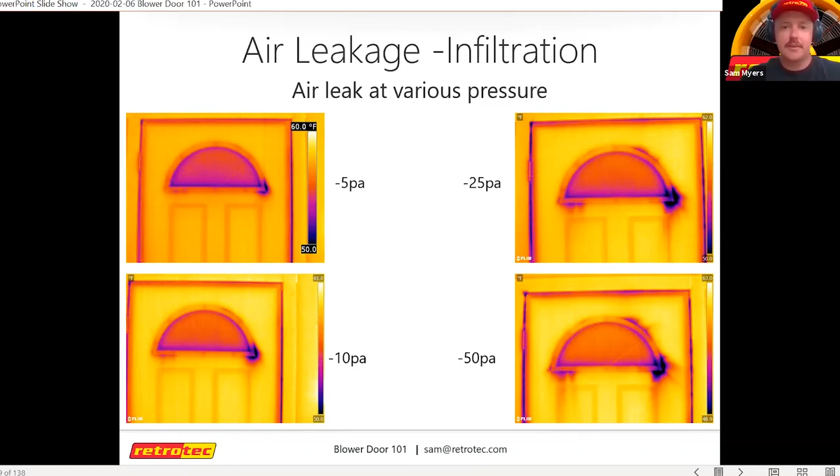So these are pictures from my friend Jay Bowen. He's a thermal trainer up in the Green Bay area. Just looking at this one leak from 5 pascals to 10 to 25 to 50, that's just one example. But if you get a more complicated leak in a wall somewhere, if you run it all the way up to 50, it may be difficult to see exactly where it came from. So I usually start around 15 and walk around with my camera, have my controls on my phone, and bump it up from there if I need to. So just looking at leaks there.

But thermal cameras are so cheap now. You can get a FLIR One for your phone for $500, and for what we're trying to do here, they work fine. You can get good enough pictures to see where your problems are. That's an attic. You have to have the temperature differential, right? Yeah, you do. Hot inside and cold outside, or vice versa. Yeah, we recommend at least a 14-degree delta T. You can get away with less sometimes, but usually that's ideal. If not, then that's where the smoke testing comes in handy. You can fall back on that. Yep. But yeah, this is an attic knee wall.

These are notorious for being super leaky because usually they don't have some kind of rigid backing on the back. Like this house we just got now, I've got to tear into it to get a new attic access and do that. So that's going to be a fun hot summer project that I'm going to do.

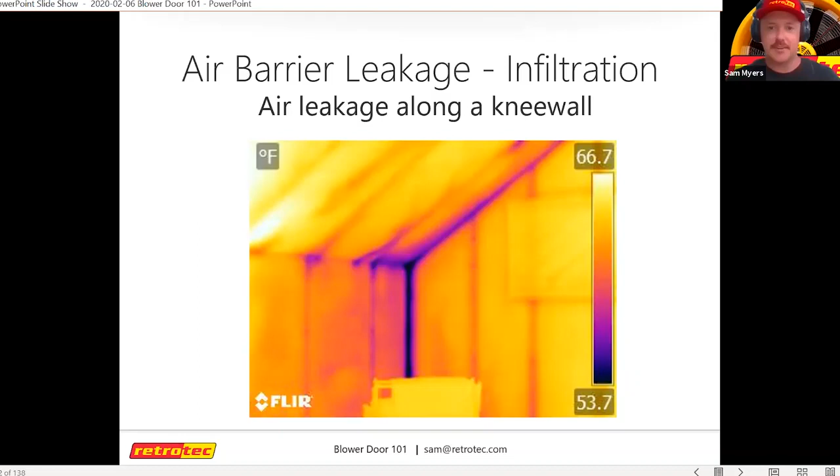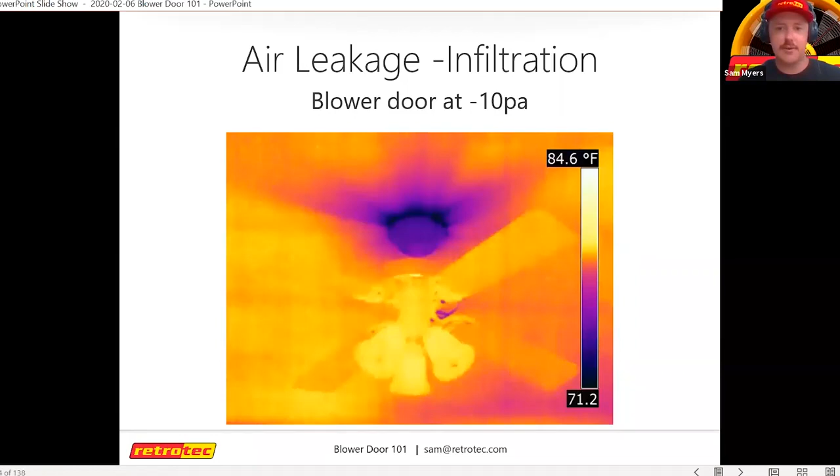doors with poor weather stripping. We missed some insulation there and we have a leaky wall. And again, this is at 10 pascals, looked like a portal to hell. Yeah. And that's just at 10 pascals. So yeah.

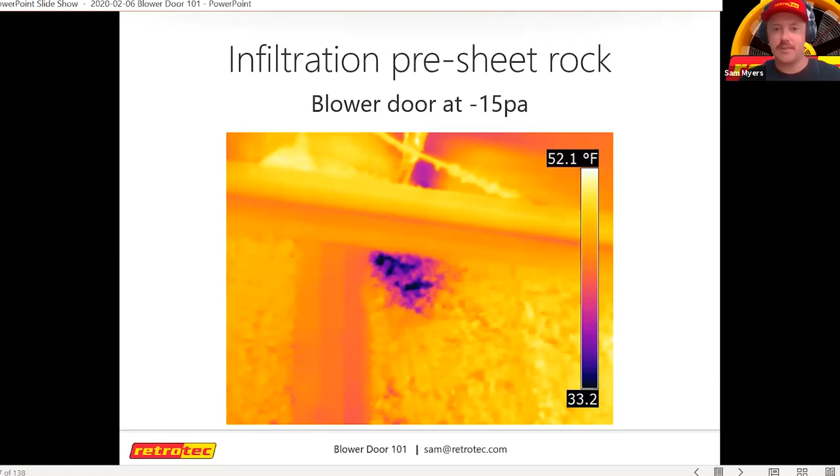And then finding really small leaks there. Like for example, if we were looking at that wall, if we were just blasting it at 50, it may be really hard to pinpoint exactly where that was coming from. So, plumbing stack not sealed through a top plate. So all kinds of problems you can find with thermal imaging.

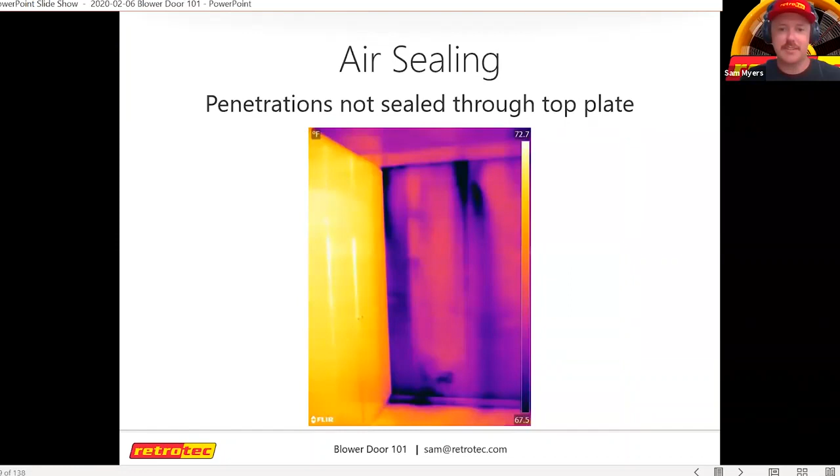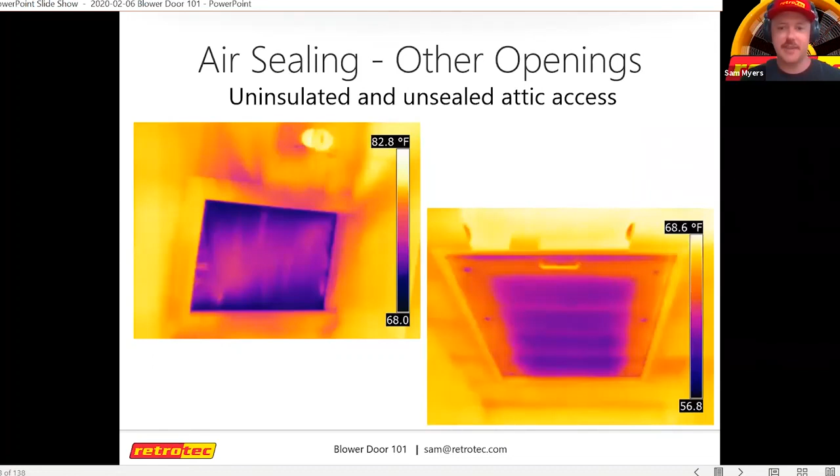uninsulated attic hatches, those are easy to get to pop up. You can see if the gas is still left in the window or not. So we can see these top two have expelled. This one's on its way out. This one's still okay.

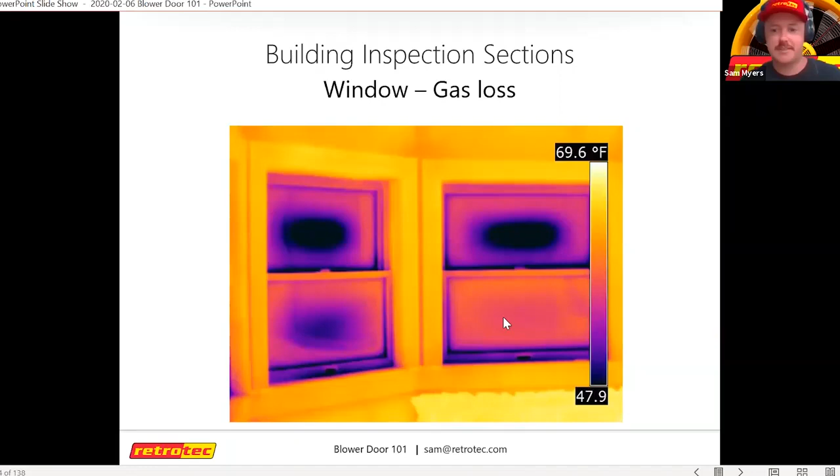So I'm getting towards the end here. I want to talk about a couple of new things that we have coming out that are going to roll out this year. This is what's called the SmartCloth. So this will end up replacing the cloth that comes with our blower door. This actually has tubing stitched into it. So there's no need for the red tube to toss outside anymore. So what this helps is with wind dampening.

So when we start a blower door test, we have to do this thing called the baseline test, which allows us to remove the wind factor outside. So you let that gauge balance out for a little while and then take an average, and then it kind of removes that from the equation. It's like zeroing out a scale before you weigh something. So you're trying to remove that wind issue. But sometimes it's hard. On windier days, the less accurate your test is going to be.

So what we've done here is put tubing in the fabric itself and branched it out in a couple of locations. And we actually did some tests with it. This is on a day in Washington State where we had some 20-mile-an-hour winds, and the blue dots are the conventional way. The orange dots are with the SmartCloth. So you can see that the wind didn't affect it as much as the conventional method.

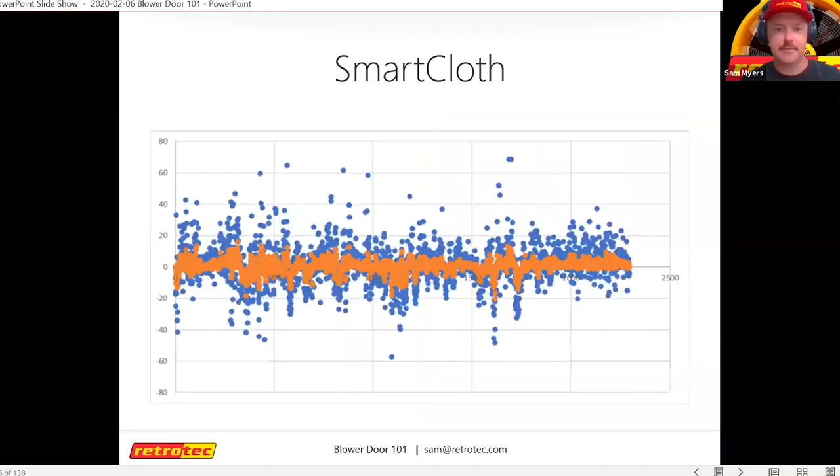So that's just a new product that we have coming out to try to deal with the wind issue. Because there's never really been a product that's dealt with that, and it's always been a problem. So that's one way we're trying to tackle it. And then this is a new smoke emitter that we're coming out with. So the one that we have now is made by a company called Look Solutions in Germany, and it costs $1,000. So we're making our own and going to sell it at half the price of that.

And it's going to be just a handheld smoke gun, and it'll have Bluetooth on it, so you can actually discharge it from other locations. So if you're doing like a mock-up test on a window, you can actually set it inside that test assembly and discharge it from the inside. Or you can put it on an extension pole and get it up like 30 feet if you need to, and still discharge it from your phone. So that's something new that's going to be rolling out this summer.

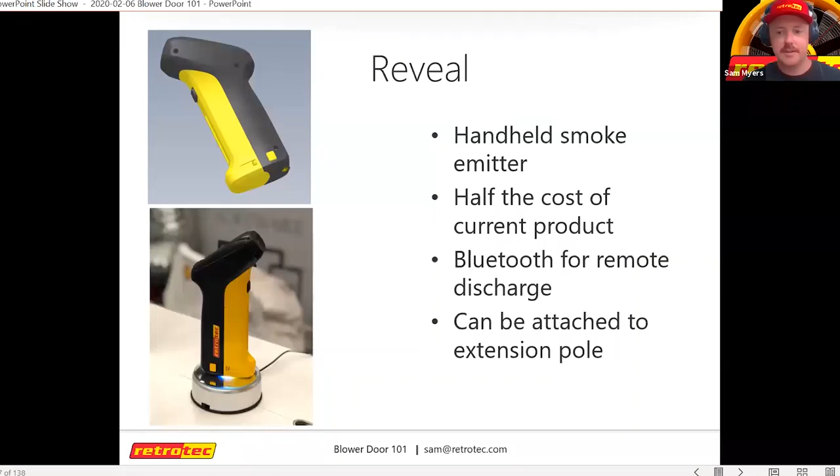Thank you so much for that, Sam. That was very thorough, but also still very concise. I'm kind of excited about the products. It seems like you're kind of looking out for the one-man gang, somebody rolling out that's wanting to run this test.